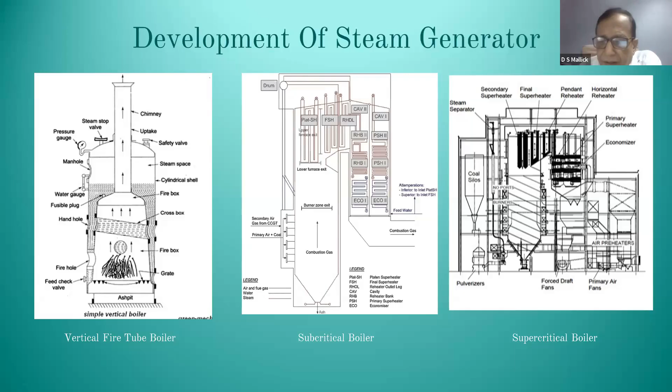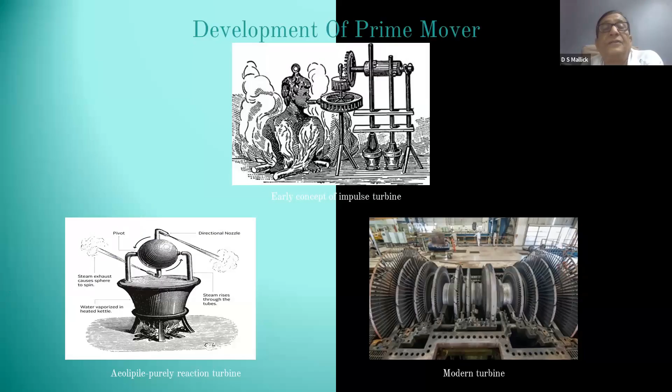And the turbine, as I told in the first slide, Hero's turbine is actually a reaction turbine as per mechanical engineers' language. There are also impulse turbines, which were developed even after that. And then modern turbines look like this. So this is the full journey of development of turbines, which is the prime mover.

Now, for those not belonging to mechanical engineering, let me give a small recap of what happens in a coal-fired power plant. Heat is applied in the boiler, water becomes steam, that steam goes to the turbine, it produces power, and the exhaust is given to a condenser.

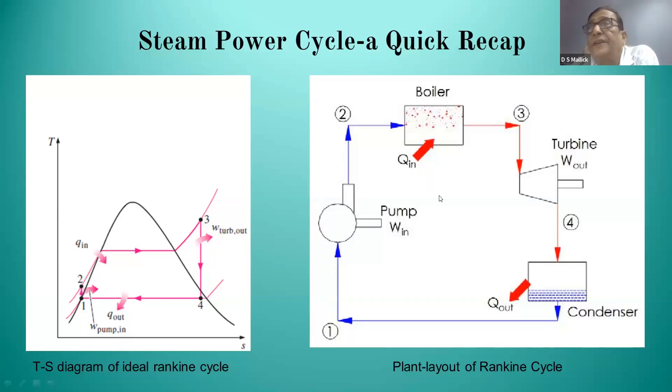The condenser is condensed by a circulating water system, and this condensed water comes back to the boiler through a boiler feed pump. This is the most preliminary cycle that man has considered, called the Rankine cycle. Gradually, from this Rankine cycle, more developed cycles came up.

What are those developments? Instead of expanding the steam from the boiler directly into the turbine, there can be some reheating. It can be expanded partly, then taken to a reheater, and then expanded again. This helps in two ways: firstly, you get some more output; secondly, when reaching the condenser, it will have better dryness fraction or lesser moisture. So that is the first improvement, called the reheat cycle.

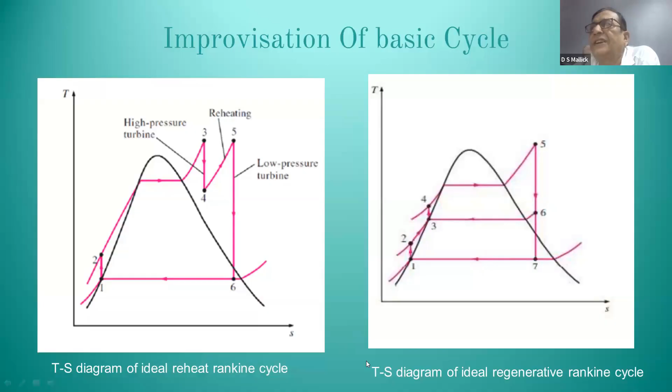Then further improvisation was made. Instead of taking the entire steam from the boiler to the condenser through the turbine, if we take some steam from the turbine exhaust and utilize it to heat the feed water, that is called regeneration, and that makes further improvement in the cycle.

So these are the developments which were coming up, and this is the reheat regenerative Rankine cycle, which is mostly applied in most subcritical plants, and not only subcritical plants, even supercritical plants. The circuit is like this.

The boiler produces steam. High pressure steam goes to the turbine. The turbine is in 3 stages: high pressure, intermediate pressure, low pressure. From the turbine exhaust, steam once again comes to the boiler, gets reheated, and this reheated steam goes to the intermediate pressure turbine, where it expands, then goes to the low pressure turbine, then to the condenser, and subsequent heaters, and back to the boiler. So this is the very common modern day cycle we consider.

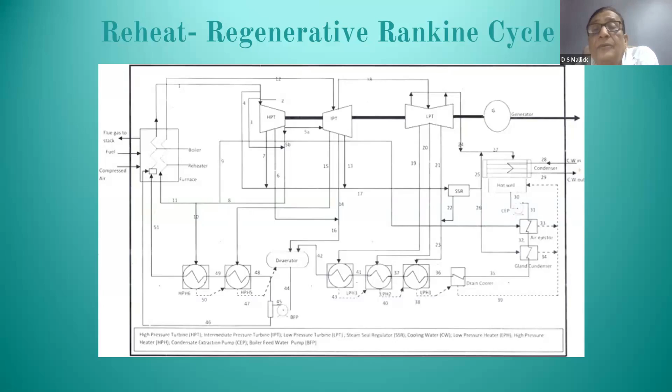So this is the subcritical thermal plant with which we were used to for at least 30, 35 years.

The efficiency of these subcritical plants depends upon, and is governed by, Rankine cycle efficiency, which is again handicapped by Carnot cycle efficiency. This says that if there is a heat engine with heat input at temperature T1 absolute and heat rejection at T2, the efficiency cannot exceed T1 minus T2 by T1. Considering practical aspects, T1 cannot be more than 550 to 600 degrees centigrade, and T2, the temperature at which heat has to be rejected, cannot be less than about 40 degrees centigrade. So the maximum efficiency can be something about 60% if you just make the calculation.

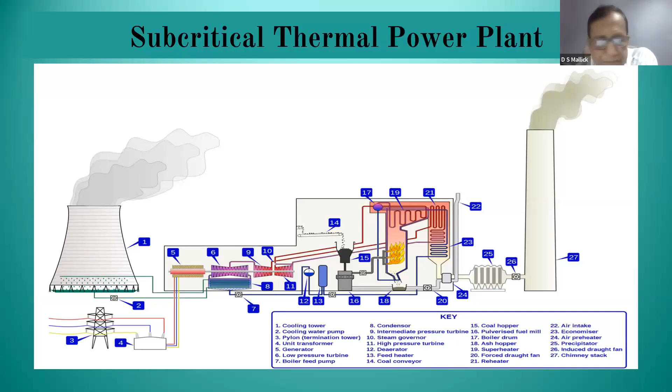Now, so far we are happy with the subcritical. Why are we so stretched? Because unless I can improve the efficiency, I am depleting the fossil fuel. If my plant is running at 35%, the amount of coal I burn can certainly be reduced if the plant runs at 45% efficiency. So depletion of fossil fuel is one major point we need to consider.

Carbon footprint: if I produce 1 kilowatt hour of energy through a coal-fired power plant, around 0.7 to 0.8 kg of CO2 is generated and emitted into the atmosphere. My target will be to reduce it lower. Whenever there is combustion, carbon will be converted to CO2, so I cannot get rid of CO2, it has to be emitted. But if I can improve the efficiency of the entire operation, then for the same megawatt I will burn less coal, so less CO2 will be generated. So the CO2 footprint will be lower.

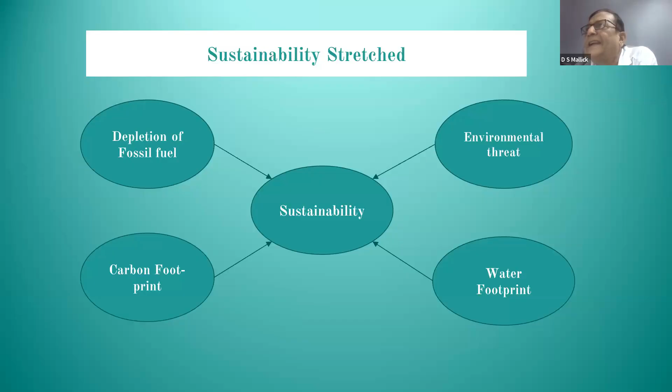Then water. For any power station, the rough thumb rule is around 3 to 4 meter cube per hour of water is required per megawatt of power produced. So if I can have better efficiency of the cycle and produce the same megawatt by burning less fuel and generating less reject, then naturally the water quantity will also be lowered. So these are the sustainability threats, and since we cannot get rid of coal-fired power stations, we have to look at how we can improve the efficiency so that all these problems can be addressed and improved as much as possible.

As I told you, the limitation of subcritical power generation is lower efficiency. Cost of power generation, if the efficiency is lower, naturally the cost of power generation will be higher, plant size will be higher, environmental impact will be higher, and there is less flexibility. This is another point heavily favoring supercritical: low efficiency in part load.

One of the most important factors nowadays is that a lot of solar plants have been installed across the entire country, and solar energy is available at a very cheap price because there is no fuel requirement for it. Therefore, during daytime, priority goes to putting solar or renewable energy into the system, so the coal-fired power station has to run at lower load. But the moment evening comes, when contribution from the solar plant becomes zero, demand has not come down. On the contrary, demand has gone up.

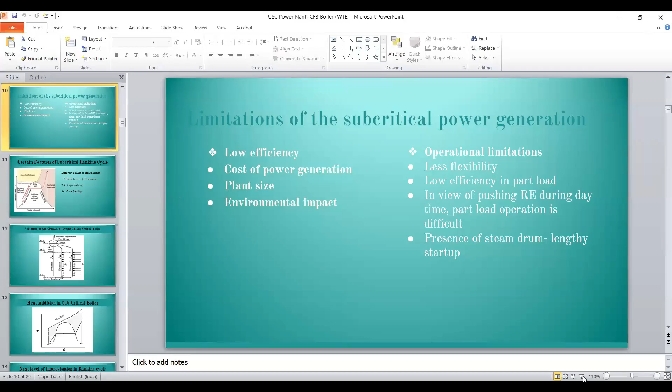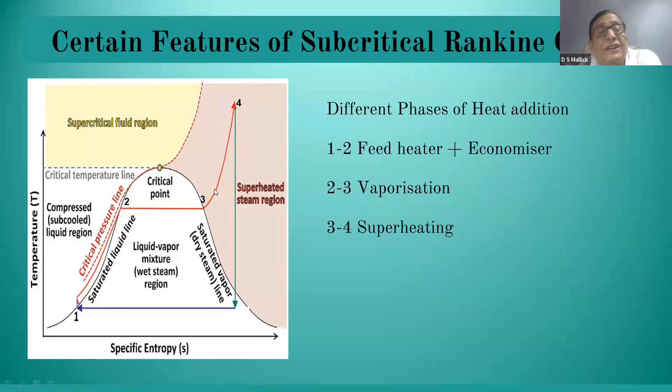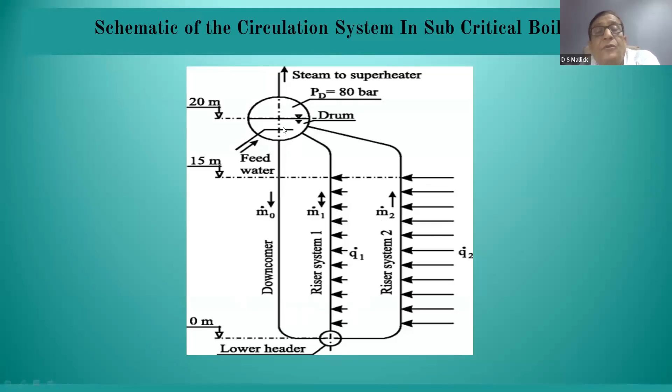This I have already explained, that is subcritical. This red line is the subcritical steam line flow. It has gone through the liquid phase and then become gaseous stage or steam stage, and then it has come down. This is the typical subcritical setup, and this is the drum. In any subcritical plant, you have to have boiler drums. These drums have downcomers, and there are risers, a downcomer system as well as a riser system. So water continuously comes here, then it is in the furnace zone, becomes hot, some steam is generated, temperature goes up, and again it goes here. So this goes on circulating. This is the principle of a subcritical boiler.

But at flue gas temperature, for a subcritical system, you see this is the steam line. Flue gas is giving heat to the steam line, and you can see that most of the time there is a huge temperature difference. Now, one common theory of mechanical engineering is that if the heat addition can be done with a lower delta T, then the efficiency of the system will improve, otherwise entropy will rise. That is common knowledge of mechanical engineering.

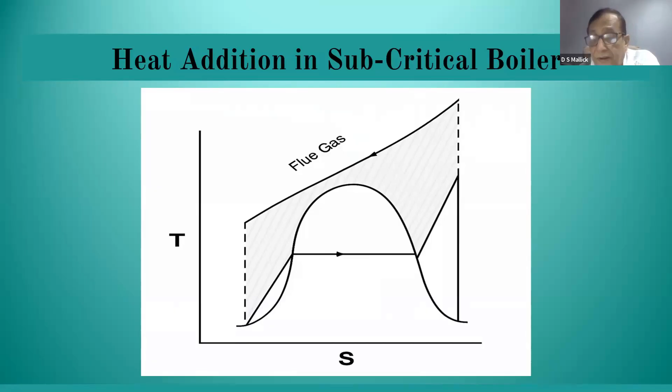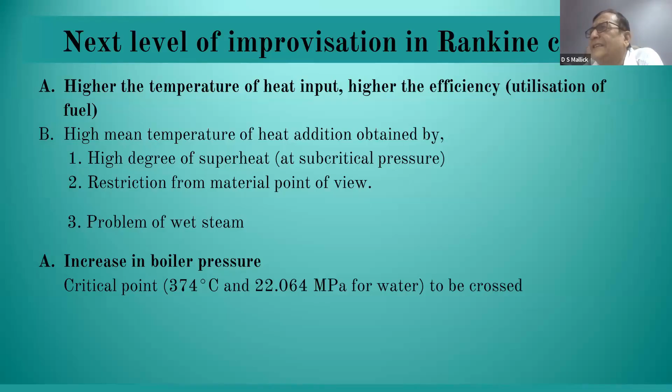And I will skip these two.

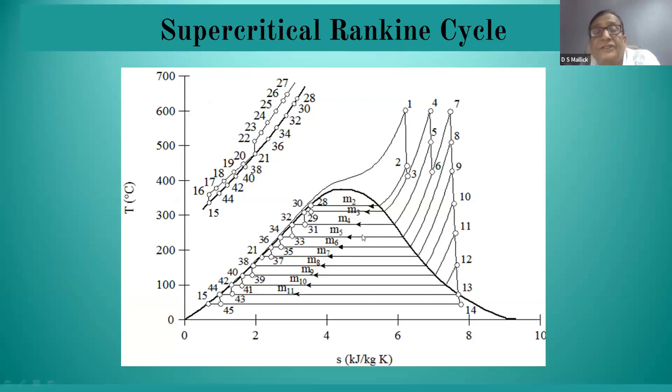This is the modern Rankine cycle, the modern cycle of a supercritical plant. You see that the steam doesn't go through this liquid phase. It stays straightaway, goes to the top phase, then comes down, then again reheat, then again reheat. Then there are some regeneration steams which go to the liquid stage, and ultimately the circuit is like this - this is the steam circuit. It goes from here. You can see that there is no clear-cut division between water phase and steam phase. That is the beauty of the supercritical.

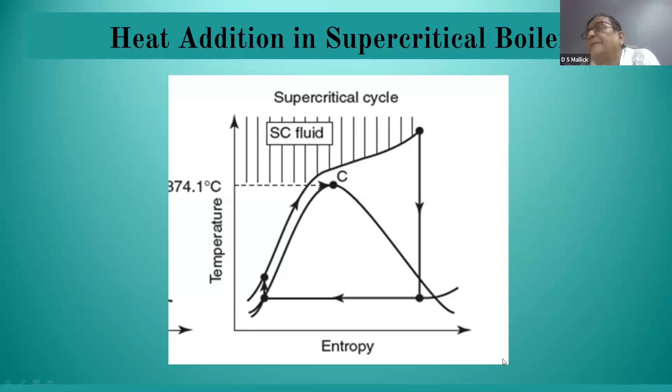What happens is that the flue gas delta T at any point of time becomes lower when we are following this curve instead of a curve like this. So that is the basic fundamental - that entropy is not generated into the system.

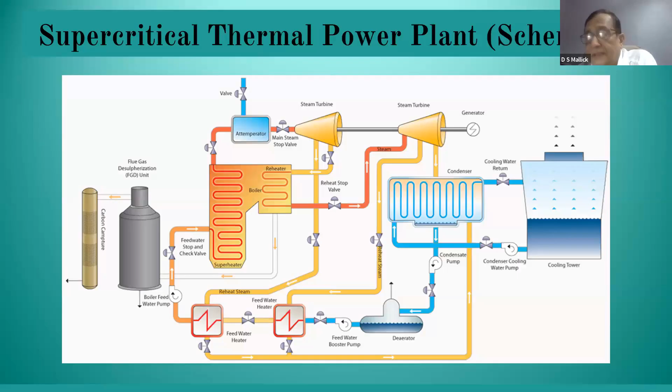Now, one important factor I must discuss - as I told, in a downcomer there is liquid going from the upper drum to the lower drum. There is liquid, and the liquid has a very good heat transfer coefficient. So whatever heat is there in the furnace, the liquid phase immediately takes it away. So if there is no such division between liquid phase and steam phase, then how can the heat transfer be that much? Because if the heat transfer doesn't take place, then what will happen is that the metal temperature will be higher and higher, and so it will ultimately melt.

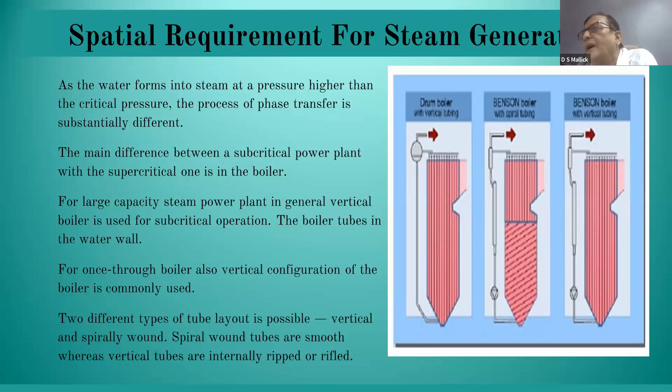So that was the challenge for any supercritical boiler, and that challenge has been overcome by making the supercritical boiler tubes specially designed. There are two designs: one is a rifle design, and one is basically a spiral design. In other words, whenever water is passing through the tubes, it goes through a swirling route. The purpose is this, that the heat transfer coefficient has to go up so that the tube doesn't get overheated. So that was the basic fundamental difference of the water tube system of a supercritical boiler versus subcritical boiler.

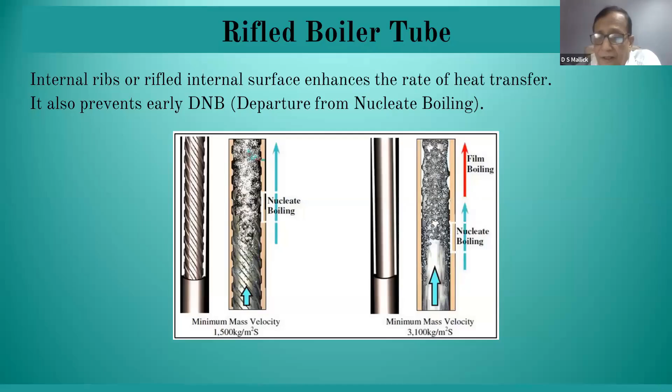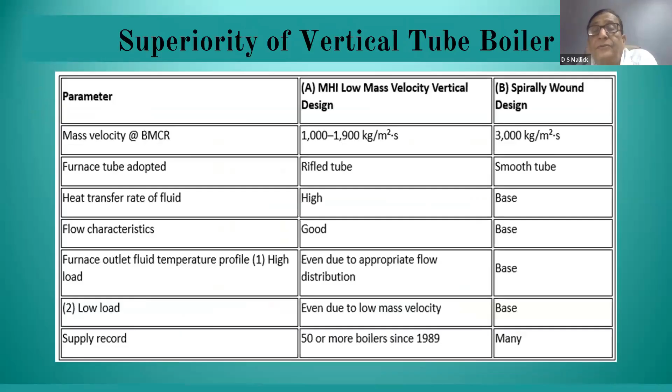And there is circulation versus once-through. Supercritical boiler is basically a once-through system. So I am giving the circulation, then I am giving the different types of tube design which are available in the supercritical technology. I am not going through all these figures and parameters differentiating between subcritical and supercritical - I am going through this.

This is very important - subcritical has a temperature roughly around 550, 560 degrees centigrade, but most important is the pressure, around 160, 170 kg per square centimeter. Supercritical pressure is around 250, 260 kg per square centimeter, and the temperature is around 560, 570 degrees centigrade. Ultra supercritical has even higher steam temperature, 650 degrees centigrade. So there has been a very marked difference in tube metallurgy to make it happen, to go to 650 degrees centigrade. The ultimate target man is trying to achieve is advanced supercritical, and you will see the rise in efficiency from 38% to 42%, to 45% to 50%.

At this moment, I tell everybody, if you want to install a power plant, you will not be given permission to install a subcritical power plant unless it is a captive power plant or cogeneration power plant. For a utility power plant, you have to go to the supercritical power plant, because the country cannot allow you to run a system with lower efficiency.

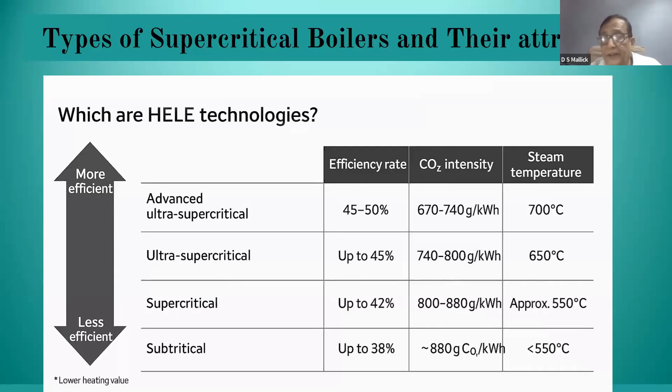This is a major point in view of today's flexible operation, which requires thermal power plants to run at lower load during daytime and at higher load during evening time. Whenever there is cloud formation, you get a huge fall from the solar system, but your demand is constant, so your backup system, the coal-fired power plant, has to ramp up very fast. All these requirements favor the utility of supercritical boilers. It's not only efficiency, not only lesser CO2 generation, but its capability to respond to load situations, to ramp up and ramp down very fast, makes it a unique choice in today's scenario.

There are enormous problems of creep and other metallurgical issues, for which many researches are being carried out across the country and the globe, because it's understood that temperature has to be higher and higher to get higher efficiency. But at the same time, the metallurgy should be such that the plant remains affordable to common people. So this compromise is being made, and many efforts are underway across laboratories to create materials that can withstand 650 to 700 degrees centigrade at affordable cost to the customer.

In short, I have collected a few figures of different installations. Now here, don't get confused. Boiler efficiency and cycle efficiency are not the same thing.

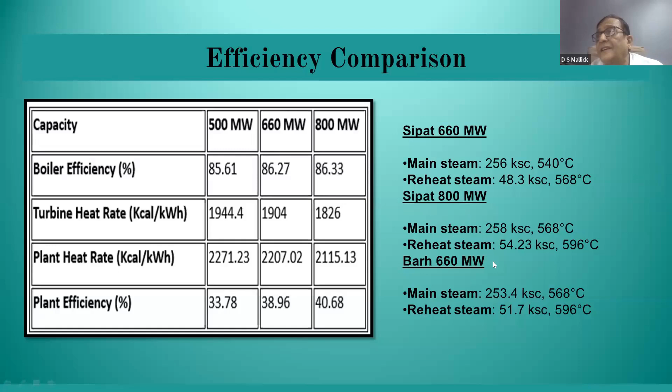As days are changing and new generations are coming, we are getting hold of better materials, so we can go to higher temperatures. I have given a list of supercritical units installed in the last 10-15 years in the country. It is not exhaustive; there are many more. As I told you, nowadays every plant is supercritical.

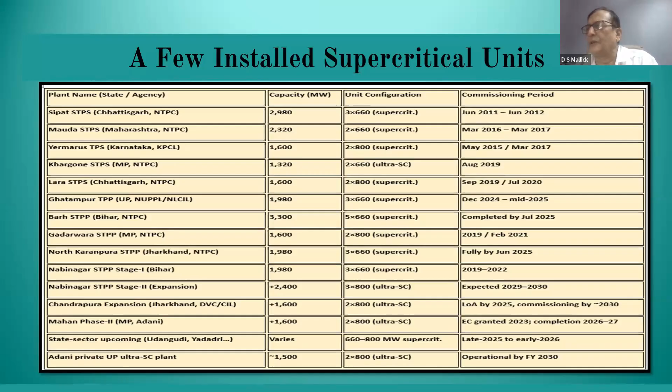In fact, we have got a few projects in the last 3-4 months, as I was telling, since about 88 gigawatt has to be pushed into the system through coal-fired plants, and we are getting our share too. We have got DVC's Durgapur, DVC's Maithon, and then we have got Adani's few plants. So a lot of activities are being done nowadays.

And with this, I stop here. Now I go to another theory, the circulating fluidized bed boiler. It's another innovation.

What is a fluidized bed? If you have a fixed bed of coal and push some air from the bottom, initially if the air velocity is small, the bed will remain as it is. If the air velocity goes up, the material will take the shape of a fluidized state, as if it expands in size.

Then if you push air at a higher velocity, you will see as if some bubbles are formed. This is called a bubbling bed. If you give even higher air velocity, it will start turbulating, and then it is almost reaching the circulating fluidized bed state. If the velocity is even higher, the material moves from the furnace and goes outside, and that is called circulating bed. So in circulating bed, I have to intercept the material again and push back whatever is unburnt. That is circulating bed.

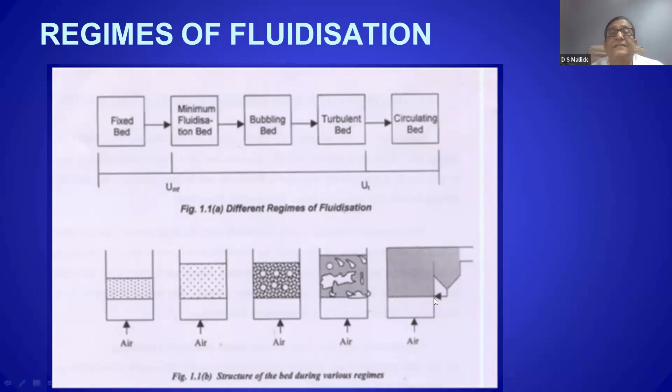This concept is not very new. The first circulating bed boilers were developed in the 1980s-1990s, and the first CFBC boiler was developed by BHEL and put into operation in 1992. Since then, there are 4-5 companies in the country which have developed CFBC boilers to a further higher level - Thermax, ISGEC, ThyssenKrupp, BHEL. Cethar Vessels was a very good company, but they have closed. But circulating bed has now reached a stage where it is as reliable as a pulverized fuel fired boiler, and its efficiency is also quite high.

Now why this concept? Why take up circulating fluidized bed when we already had reliable pulverized fuel fired boilers, developed over 50, 60, 70 years? The concept has come because of two factors. One factor is that very often the pulverized fuel fired boilers are designed for a particular variety of coal.

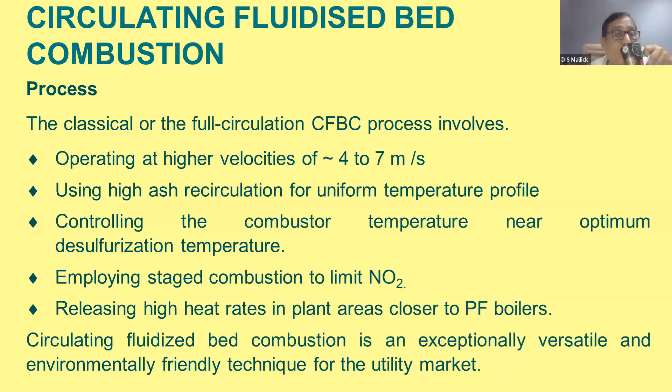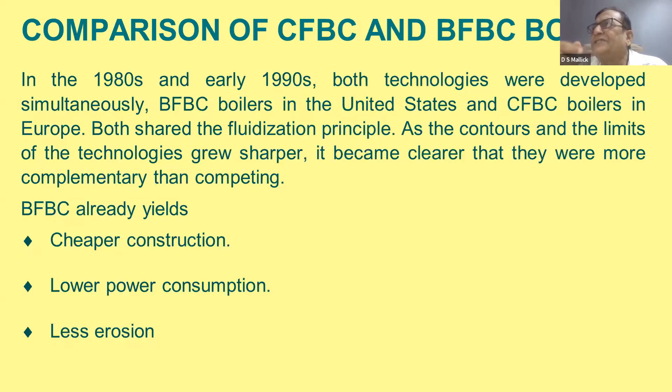As I told initially, bubbling fluidized bed boiler is another type of boiler where the air velocity is little lower. About 20-25 years back, almost all fluidized bed design boilers used to have bubbling bed. But bubbling beds are good as far as the capacity is around 100 tons per hour. When the capacity increases beyond 100 tons per hour, circulating fluidized bed boiler has many added advantages, and so it is taken.

And particularly, I have given some comparison here. You can go through it.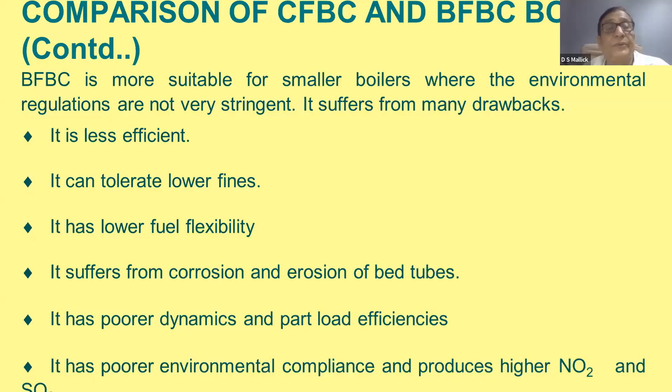Because I'm running short of time, I'm skipping something, and I will tell you something about circulating fluidized bed boiler. There are two types, as I have told, that circulating fluidized bed boiler runs at a higher air velocity for fluidization. So naturally it takes in the flue gas, and it takes a lot of coal dust also.

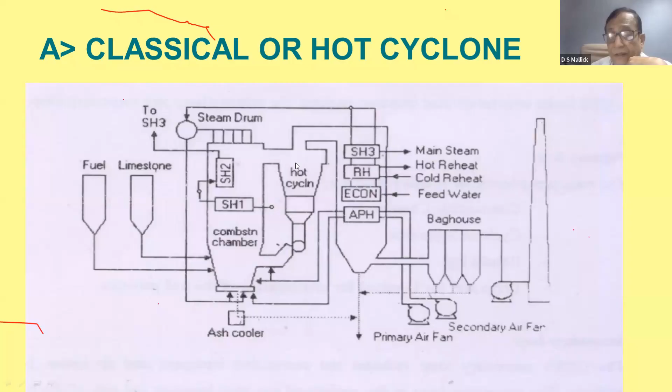But in a cold cyclone, heat transfer surface areas have been put into the system, and after the temperature has sufficiently come down, it goes to the cyclone. Here temperature is 450 degrees centigrade. This is cold cyclone. Both the technologies are available.

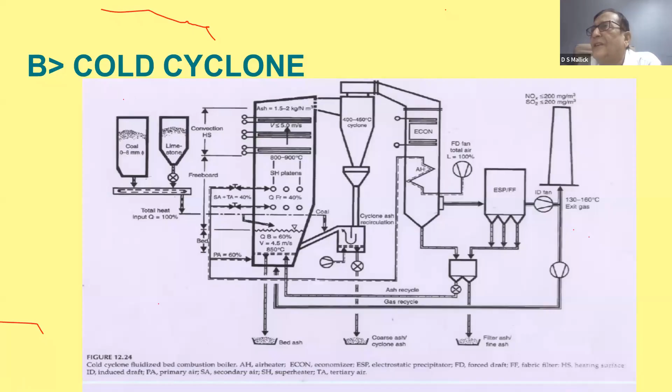One big company, Lurgi, follows cold cyclone, and Foster Wheeler follows hot cyclone. Both have advantages and disadvantages, but these are the two types of cyclones which are very rapid. One advantage is that in the cold cyclone, your refractory thickness will be lower because the temperature is lower. In hot cyclone, your temperature is higher, so refractory has to be higher.

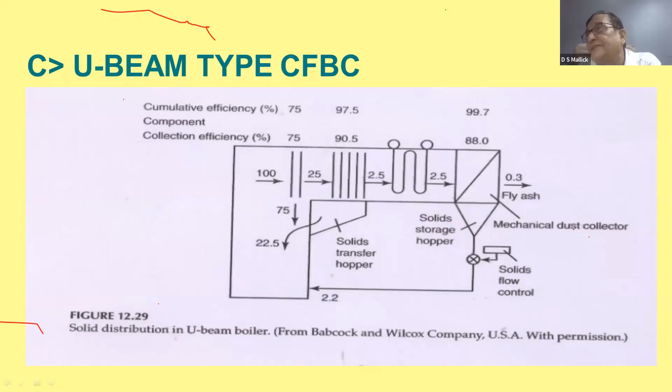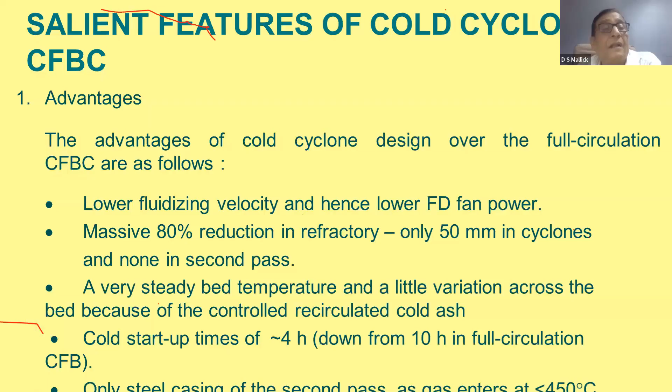And there is another type. I personally haven't worked with this system where the cyclone is located after, in a U-beam in the horizontal pass. I don't know which company manufactures it, because all companies manufacture either hot cyclone or cold cyclone technology. All the diagrams are here, and the advantages and disadvantages of cold cyclone versus hot cyclone I have given here.

One can ask me the question: if CFBC has such good advantages, that it has lower denoxing possibility, in-bed desulfurization can be done, and it can burn any type of fuel, so why is it not used so extensively? Why this subcritical, supercritical terminology? This may be the question.

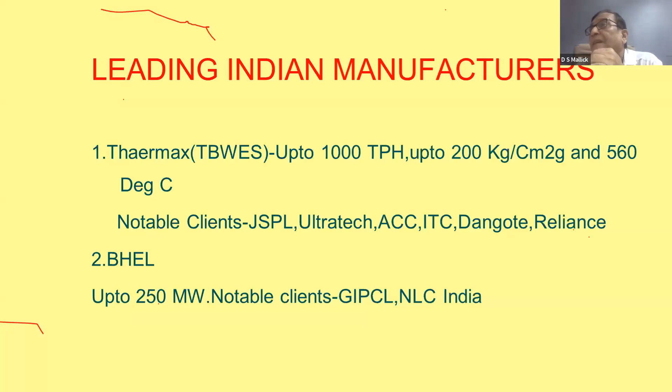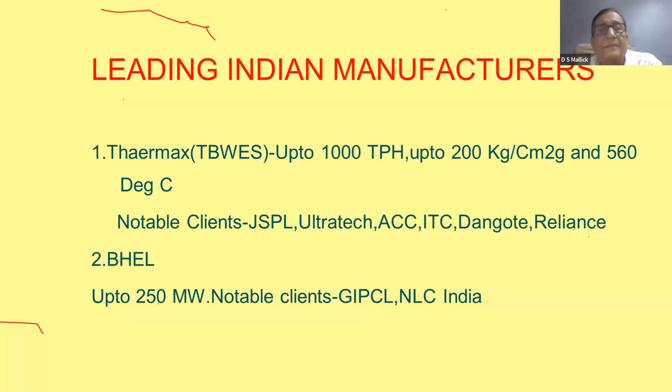I tell you that CFBC is a new development. As I told you, possibly in 1990 the first CFBC boiler was installed in the country, and it is going through the process of transition. At present, Thermax is producing up to 1,000 tons per hour. BHEL has produced up to 250 megawatt. ISGEC has produced up to 100 megawatt. Thyssen group has produced 125 megawatt.

One can ask, why can't you increase the megawatt? Where is the challenge? The challenge is that the air velocity has to be maintained around 5-6 meters per second. And more megawatt means more heat to be generated in the furnace. So if the furnace size becomes extraordinarily large, the problem is that air across the entire cross-section of the furnace may not be uniform.

Therefore, there may be areas where it is not in the fluidized stage at all, and areas where it has gone to the transport phase, such that it doesn't even get separated in the cyclone. Uniform air distribution across a furnace larger than say 20 meters by 30 meters is a big challenge, and these challenges are being overcome, with higher and higher sizes getting manufactured in the world.

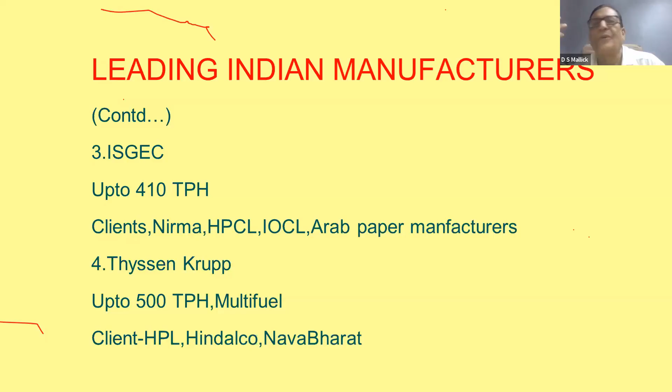And the third and my last topic, and I have about 15 minutes time so I will try to finish that, is something where I got the opportunity to work. So I thought this is something I must share with all the faculties here.

This is the waste to energy incineration route.

At present we have a huge problem of municipal solid waste. In West Bengal, about 13,000 tons of solid waste is being generated, out of which landfilling is utilizing hardly 300 to 400 tons per day on average. But what to do with the remaining thing? It is getting stored, becoming hills and mountains, and that is the fate of municipal solid waste. As more and more people migrate to cities and towns, this problem is increasing more and more.

So there can be various routes by which municipal solid waste can be processed. We were involved in a particular project where the municipal solid waste is incinerated in a boiler, and then the steam generated goes to the steam turbine and produces power.

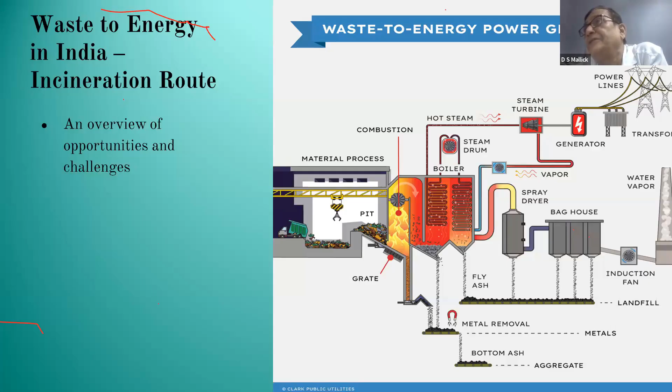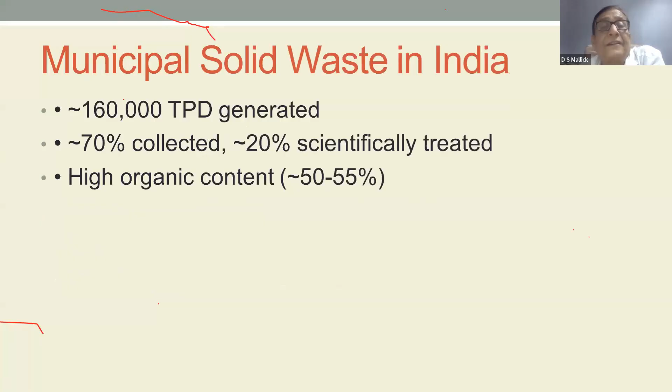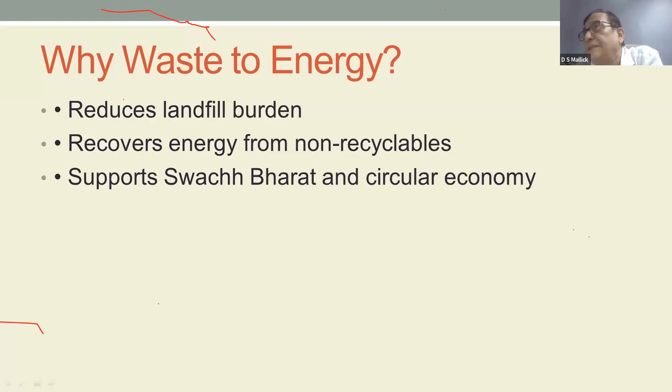So for Indian waste, I will quickly go through these things. In India, we have around 160,000 tons per day generated, and we have high organic content. About 70% of this is collected, meaning about 112,000 tons per day is collected. Now, if we can convert it, the landfill burden reduces. Energy from this waste can be beneficially used, and it supports Swachh Bharat and the circular economy.

Solid waste can be classified in various ways: based on source, based on biodegradability, based on combustibility, based on compostability.

This is very important. The best use of municipal solid waste at this moment, as I gathered from the dump yard and also from government agencies, is preparing compost, which can in fact be sold at a price. But for doing so, one has to ensure that the organic waste is segregated, and that organic waste can be nicely utilized to make compost, but not everything.

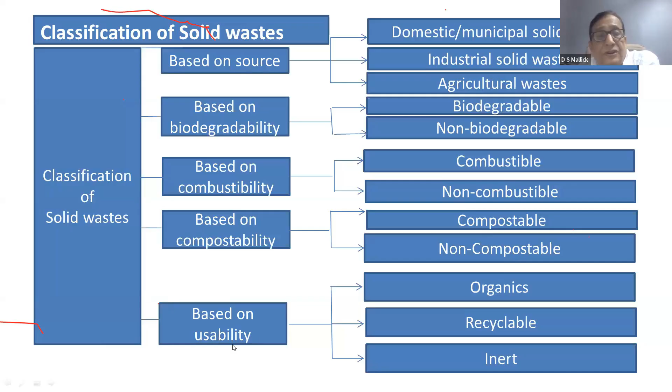Based on usability, these are the various classifications that I got. The figures I get from literature show that in Greater Calcutta we are having 11,520 tons per day. This figure is a little old, but it's a huge figure. Out of which, as I told you, hardly 300 to 400 tons per day are used for landfilling. So no wonder every dump yard is getting filled very shortly, and the government is looking for other dump yard areas. Dump yards have their own problem—if you go past one, you can feel the smell, and it's a horrible thing.

So if we can utilize it, the calorific value is not very bad. I'm habituated to kilocalories per kg, so 5 megajoules per kg means around 1,000 kilocalories per kg. In Greater Mumbai, it is something like that. In Chennai, you have a slightly better figure in megajoules per kg. But the underlying bottom line is that each of these municipal solid waste plants is getting stretched because their land areas are being completely occupied.

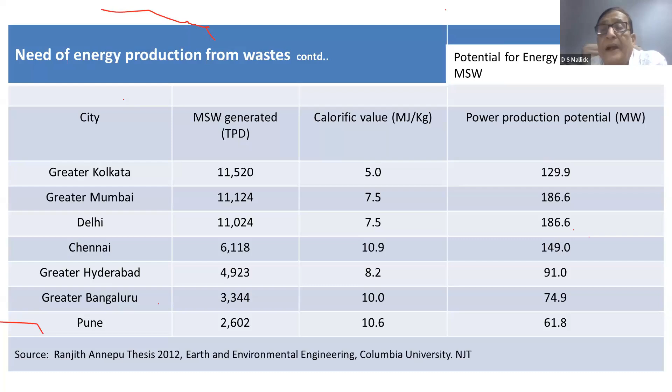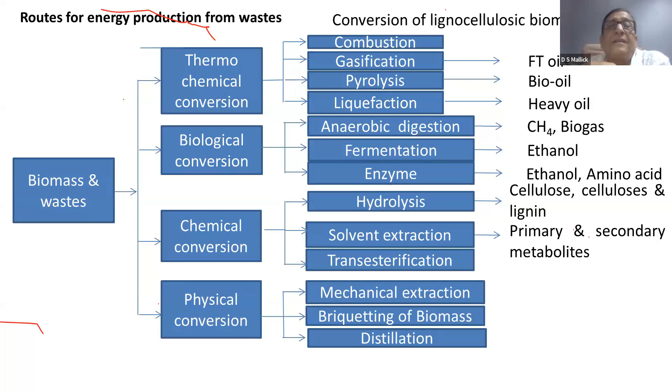These wastes can be converted in various ways. But one important factor, as I've mentioned before, is that the methods have to be affordable to the common public, and the ultimate product has to be sellable to the common public. Not all are sellable to the common public till now, unless a suitable amount of research is done and cheaper versions can be utilized.

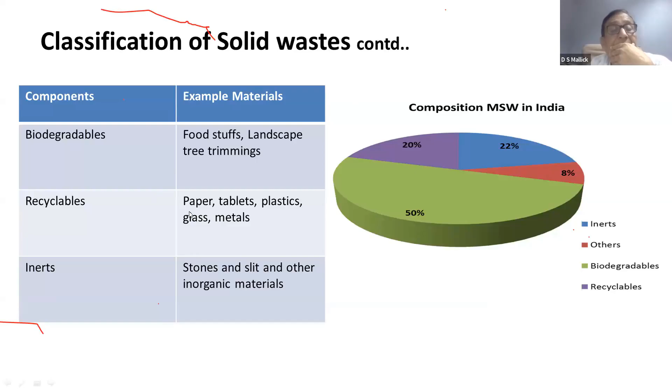These are the different types of MSW we get in India: biodegradable foodstuffs, recycled paper, textiles, plastics, inert stones and silt, and other things. Waste suitable for energy production is solid waste with high carbon content, wastewater with high BOD and COD value, and waste gases. We will concentrate on solid waste only.

Waste characteristics include high moisture, low calorific value, and high inert fraction. Again, as I've studied, using the Tanner diagram you can understand whether this is combustible or not. Fortunately, I made some laboratory experiments with some waste—we took samples from nearby areas, which we call Dhapa, and fortunately, it is combustible.

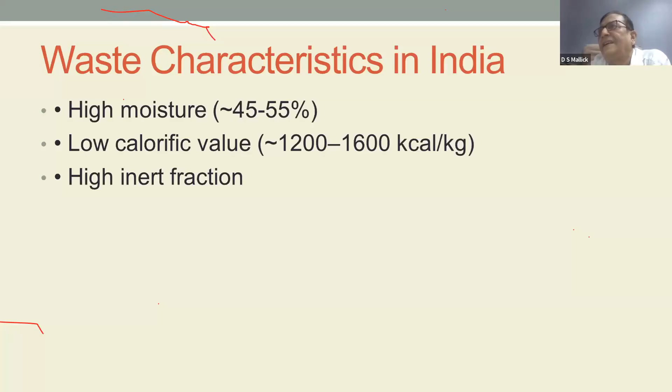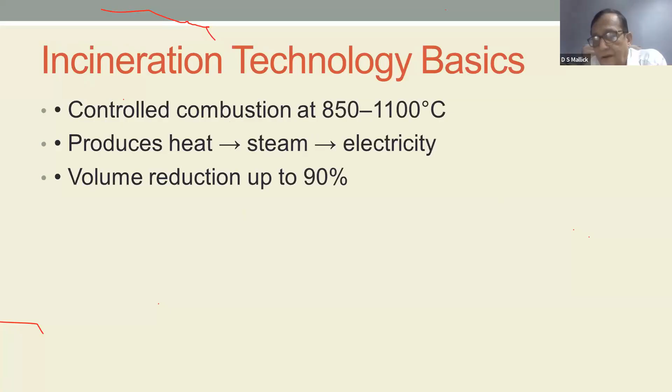Incineration technology is controlled combustion, which produces heat, steam, and electricity. By virtue you have some ash, but volume reduction is 90%, so 90% of the problem is solved. The incineration process is: waste feed, combustion chamber, boiler, TG, flue gas treatment, ash handling.

One ton per day of MSW is around 400 to 500 kilowatt hour, if you convert the heat value and the convertible portion to electricity. You can get around 5,000 megawatts of electricity in India if properly recovered.

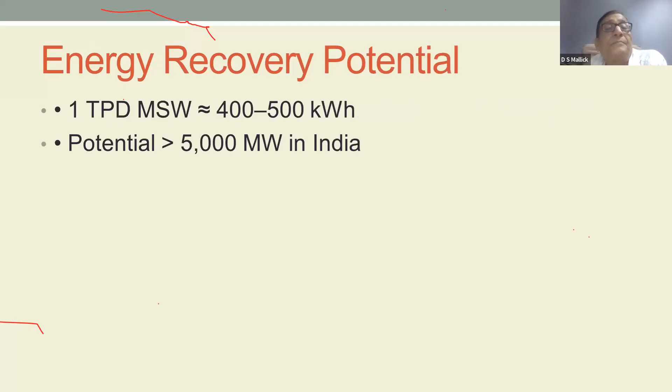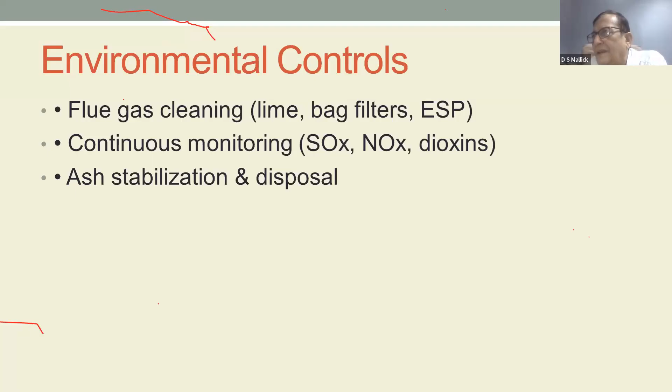But the problem is flue gas control. Flue gas has many things, dioxins, lime, so you have to have some flue gas cleaning mechanism. The cleaning mechanisms that have been developed, we are working with a Thermax boiler, and it gives the guarantee that whatever is the code standard, it can adapt to that.

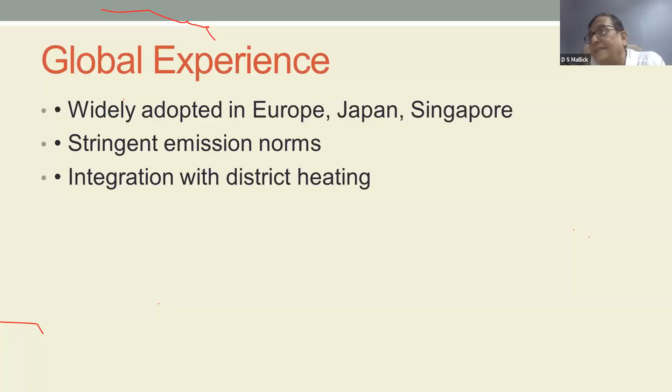The global experience is very popular in Europe, Japan, Singapore, in spite of stringent emission norms. They can restrict to low temperature heating. Normally they produce low temperature heating and use it for district heating. In India also there are a few plants.

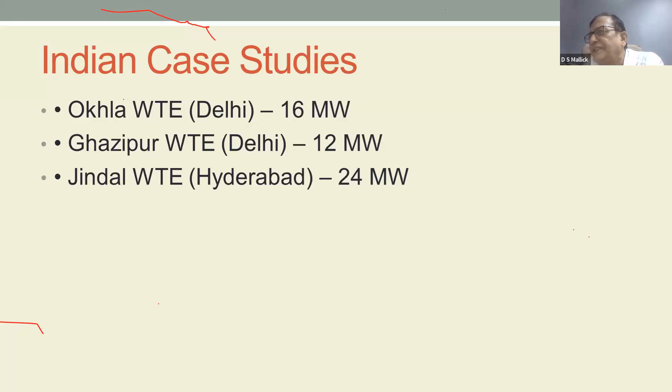We are doing a plant, but our client doesn't want the name disclosed in public forum, so I cannot tell you officially. But we have done the initial thing, made the layout, and contacted SHUDA, the Urban Development Agency, gone through an MOU sort of thing to supply MSW. Boiler order has already been placed, layout has been finalized, and it will produce steam utilized for electricity generation as well as steam for process heating.

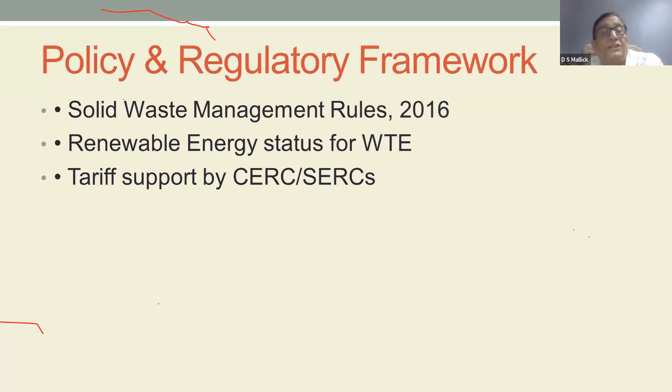There are some regulatory frameworks which we have to follow, and we are certainly following these things. Institutional supports are there, and that will be introduced to you now.

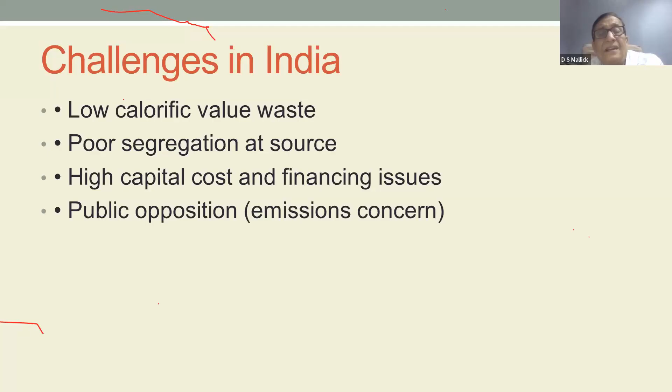Top challenges in India: low calorific value waste, poor segregation at source is one of the major points in our problem. High capital cost and financing issue is another problem. Public opposition regarding gas cleaning is also an issue - people are not very comfortable with it, although there is a very clear guideline of what the gas cleaning and outlet emission should be. Still there is concern among local villagers and local people. So these are the challenges: high capex, and opex depends on waste quality.

We had launched an MOU sort of thing with the government. They told us they will be giving MSW at our plant, located about 100 kilometers from the dump yard, free of cost. They are so keen to get rid of this waste that they have given us the fuel, MSW, free of cost at our plant premises.

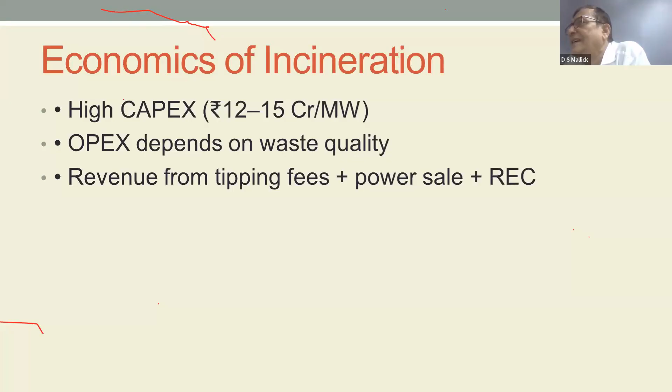Composting, I told you, whenever organic waste is there, composting may give better revenue. Biomethanation is okay, but revenue is not good. RDF and incineration is suitable for mixed MSW.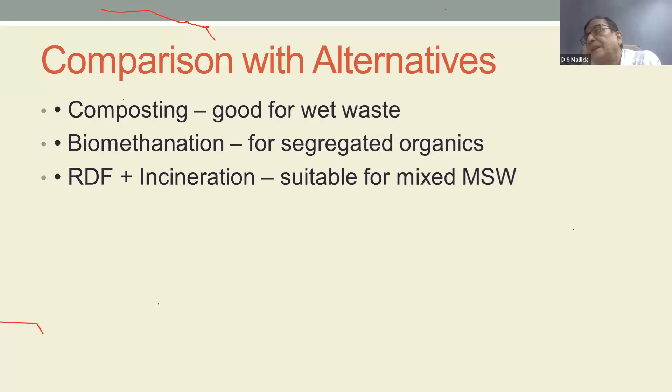RDF is called refuse derived fuel. From municipal solid waste you can improve the quality a little bit, and put it in a form called refuse derived fuel, which is easier to burn and has a better calorific value of around 3000 kilocalorie per kg. So we are targeting RDF as our fuel, but in case the government cannot supply it, our boilers are also suitable for burning MSW itself.

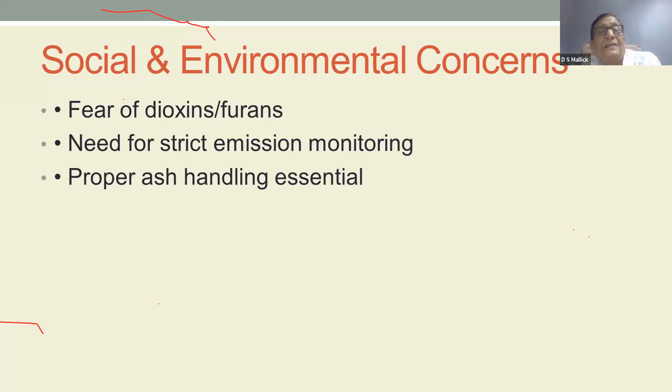Environmental concerns are there, fear of dioxin and furans. But I tell you, technology has been developed, and dioxin and furan release can be kept within the acceptable limit set by the code.

We had done this project. Waste generated in West Bengal is around 13,709 tons, last year's figure. MSW collected that comes to the dump yard in West Bengal is 13,356 tons per day, and only 667.6 is treated, and landfill is only 202.3 tons. This is from their literature, last year's figure.

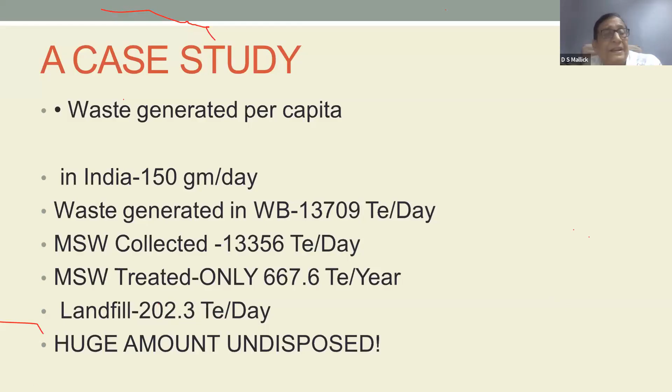So what does it mean? It means a huge amount remains undisposed. One little step we are taking is that we take MSW from the dump yard and convert it to RDF. There are very standard companies who convert MSW to RDF, and the process is not very costly at all. Then it's incinerated in a boiler for production of steam, converted to electric power and process steam.

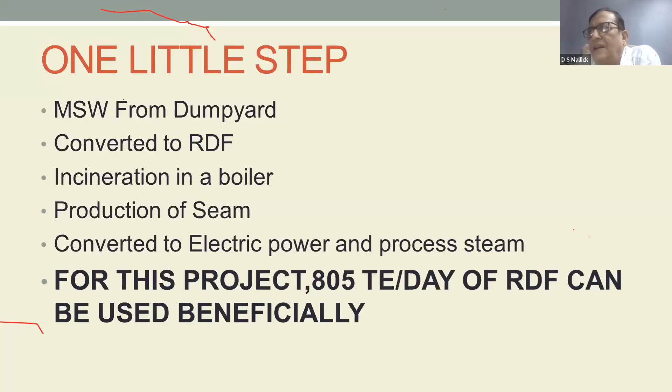805 tons per day of RDF can be used beneficially, which means about 1,000 tons per day of MSW can be utilized regularly. Gross steam capacity from the boiler is 78 TPH.

I assure you, whoever is listening, that I have visited a few boilers running with this RDF and MSW, and they are quite reliable. You can trust them.

Steam pressure we are generating at 52 kg per square centimeter. Steam temperature 405. It produces 12 megawatt electric and 30 TPH of extraction steam as process steam.

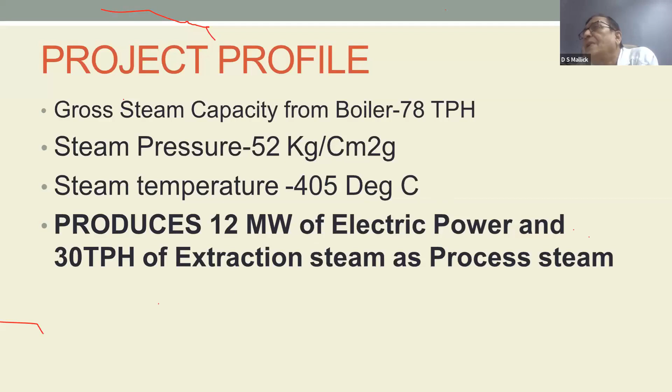Now the question that everybody will ask: how is the cost? I mean, whether it is because capital cost of these boilers is more compared to ordinary boilers.

So what we have done is we have designed the boilers, specified to burn non-recyclable solid waste, rice husk, wood chip, bagasse as well. But we have not taken a fluidized bed boiler because MSW is a very difficult burning proposition, and therefore we have gone for a grate fire boiler. Although if we had been assured of RDF all the time, we would have gone for fluidized bed boilers.

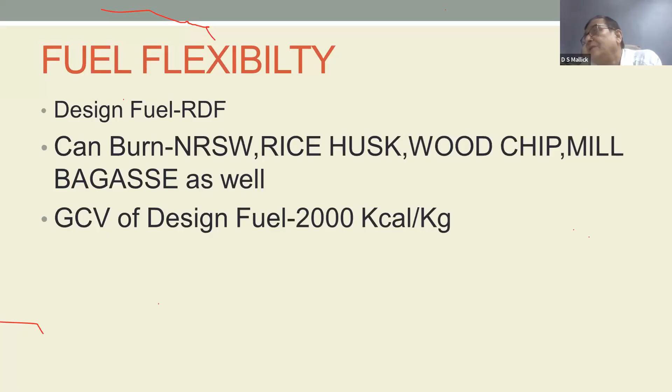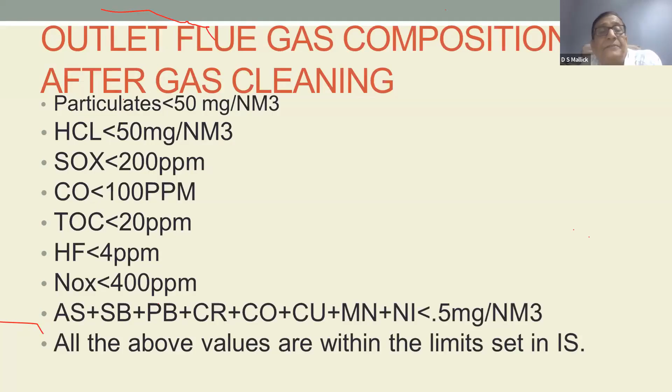GCV of our design fuel is around 2000 kilocalorie per kg. And outlet gas composition, this is the guaranteed figure by the boiler manufacturer, which is satisfying the norms of the country.

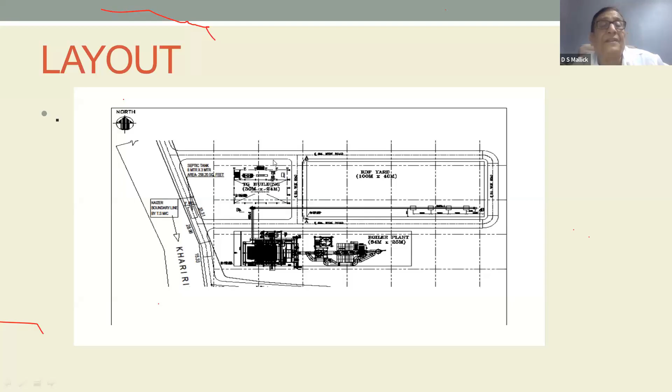This is the boiler, and this big area is the RDF storage here. From the boiler, steam will be coming, and this is the fuel which will be coming to the boiler, and this is the gas cleaning plant, ultimately emitted through the stack. This is the turbine generator building, and this is the plant, and we are starting the work very soon.

Now, our capital cost, what we had submitted to the bank, is 148 crores for a 12 megawatt plant and 30 tons per hour of steam. What is very important is that return on investment is only 3 years. So you are not only helping the country and the municipality, but if you can invest 148 crores of rupees, you are assured that your investment is recovered in 3 years' time, which I believe is a very good return.

But of course, here the return shows a little better because of the 30 tons per hour of steam we are getting from the plant as well. Other than the 12 megawatt electricity, we have considered the cost of steam as well. So that is what it should be. The bank has argued about this, and that has been accepted also. So ROI is not bad.

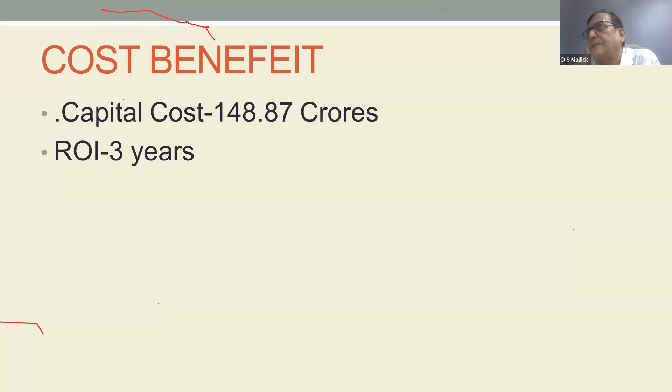I think any ROI less than 5 years is always acceptable. It should be acceptable. Over and above that, I have not considered any other benefits -- because I am ultimately burning some waste, carbon trading could have been done, but we have not taken those figures here. Whatever figures are tangible, those we have put here, and in spite of that, it is quite attractive.

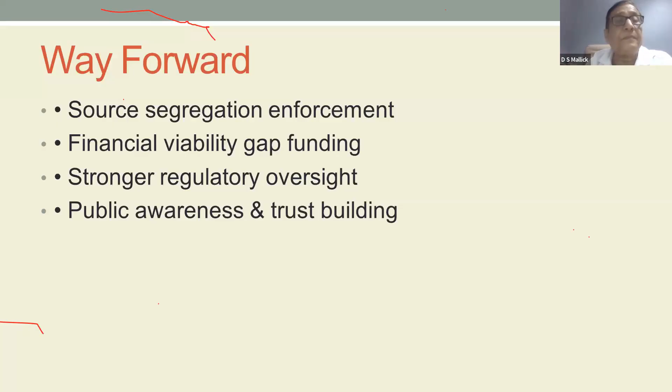Conclusion is waste to energy via incineration can be part of India's solution, but needs integration with segregation. And of course, the plants have to be very strictly compliant, environmentally compliant. So with that, I end.